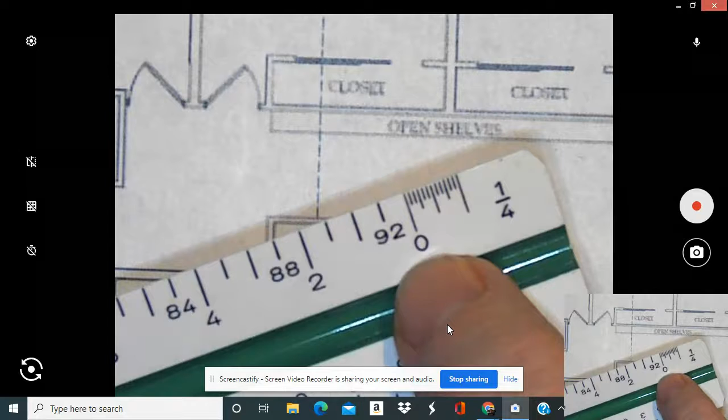So we're going to first look at the 1/4 inch scale. So this is the 1/4 inch scale on a scale ruler. You'll notice the 0 here. We're going to always start with the 0, so you're going to read the scale based on the line that the 0 starts at.

So the 0 on this one is at the bottom, so we're going to read from the bottom. On this one, the 0 here is also at the bottom, so you'll start at the bottom.

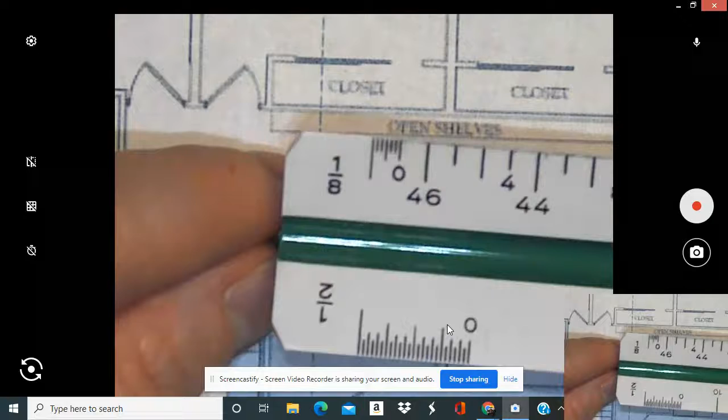On the other side, you have the 1/8 scale. The 0 is at the top, so then you'll read from the top. So this is the number from the 1/4 scale, and then the 1/8 scale starts at the top.

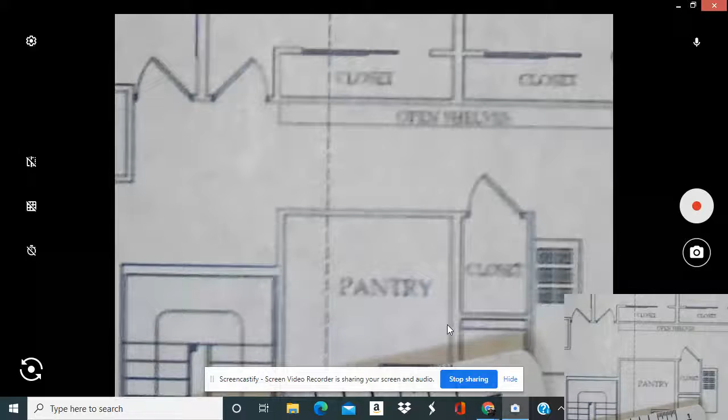So I'm going to start with the 1/4 scale, and we're going to read this closet. We're going to measure this closet right here. We're going to use the 1/4 inch scale, even though that's probably not the right scale for this particular piece. So what I'm going to do is show you how to read the 1/4 inch scale. We're going to practice.

So how do you read the scale ruler? First thing you're going to do is choose the line that you're going to measure, and put down your ruler. You're going to put the 0 on the inside line that you want to measure.

So I want to measure this closet. I'm going to measure it starting with my 0. Then I'm going to read the scale ruler. So I know my 2 starts right here, that's 2 feet. My feet are here, and then these are my inches. So I know that's 2 feet, and since I know that's 2 feet, then I know that this is 1 foot here.

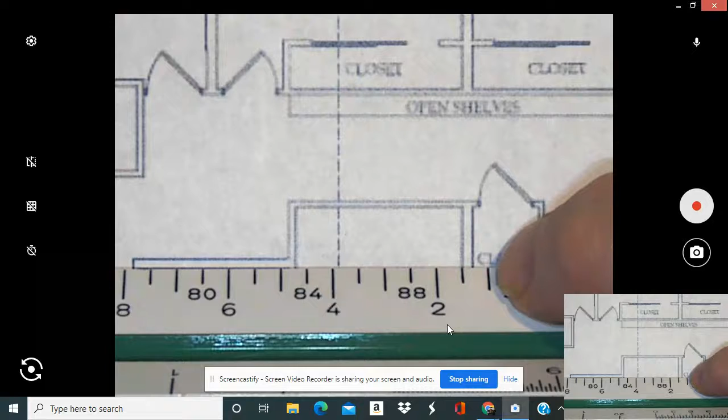So this is going to be 1 foot, 2 feet, 3 feet, 4 feet. So then that's going to be 6 inches and 1 foot and 6 inches. So I'm going to measure the closest line without going over, which is going to be the 1 foot. So that's 1 feet.

So then what I do is find the closest line without going over. Then I'm going to slide the ruler over, and there's my 1 foot line. So then I have to look at my inches. On the 1/4 inch scale, every single line - there are 12 lines - so that means each line represents 1 inch. So there are 3 lines, and that means I have a measurement of 1 foot 3 inches.

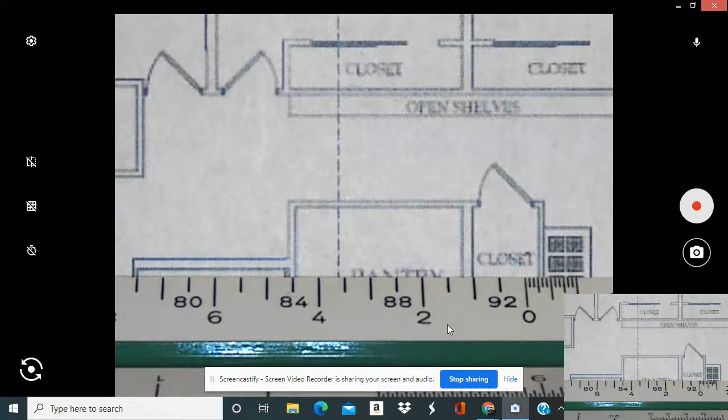Now I know that this is not the right measurement because 1 foot 3 inches would not be accurate for a closet on a floor plan. So I know I'm in the wrong scale because that doesn't seem right to me. So I'm going to go ahead and go to the 1/8 scale, which is more likely.

So I'm going to do the same thing using my 1/8 scale. I'm going to put the 0 down on the inside wall. So my 0, and then I'm going to do the same thing - measure to the right, closest line without going over. So my 4 is here, that's 4 feet. So I have 4 lines between my 0 and my 4.

So that tells me that each line is 1 foot. So I have 1, 2, 3, 4. So that means the closest line without going over is going to be 2 feet. So then I'm going to slide my line over, line it up, so that's 2 feet, and then I have to count my inches. Now in the 1/8 scale, there are only 6 lines.

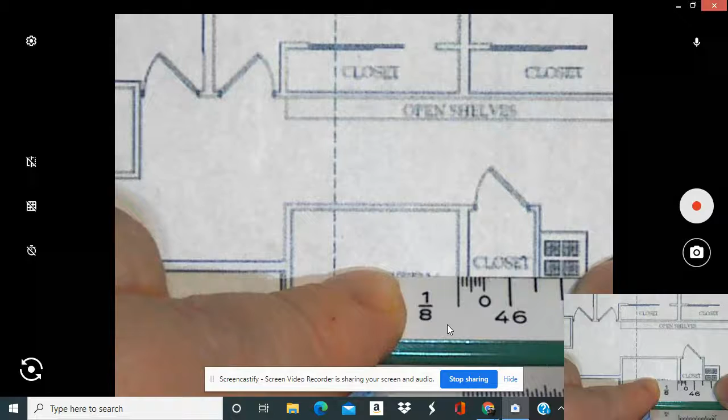So what that tells me is that each line is equivalent to 2 inches. So if I line up with a 3, that means I have 6 inches. So that is 2 feet, 6 inches. So that makes sense because we know closets are normally 2 feet, 6 inches wide.

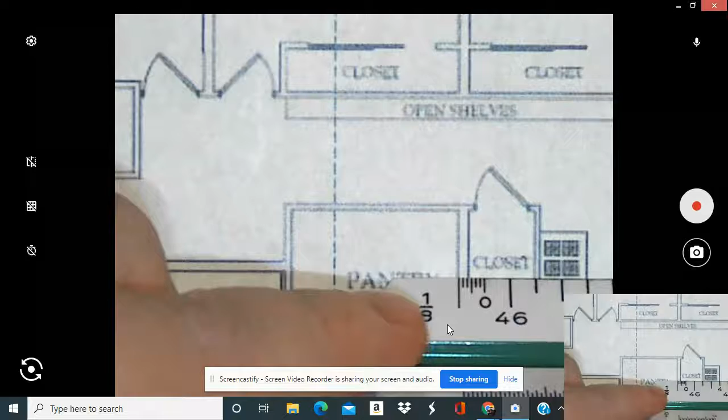So that is how you read a scale ruler. Hopefully that is helpful to you. Let me know if you have any other questions.